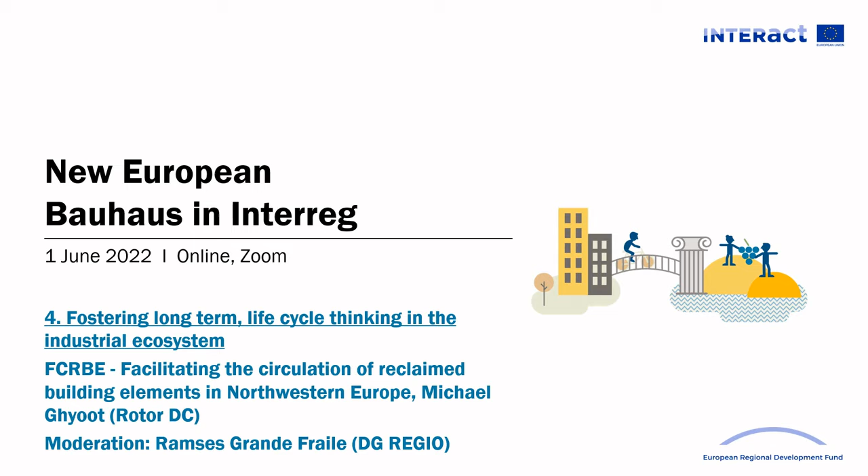Good afternoon, everybody. My name is Ramses from REGIO, and I want to invite you to join me from Interreg Central Europe, now over to Interreg Northwest Europe, where we will hear from our next and last speaker, Ghyoot. And I say last but not least, because Michael, working with Rotor, has been one of the pioneers in Europe

in not only dreaming, but also transforming our construction industry away from a linear industry where buildings are built, used, and discarded as waste, and to transform it into a circular built environment where we can design buildings for disassembly, repurpose buildings during their lifetime, and afterwards deconstruct them and use the building materials to build new buildings. So part of this has been done in context of the Interreg Northwest Europe project.

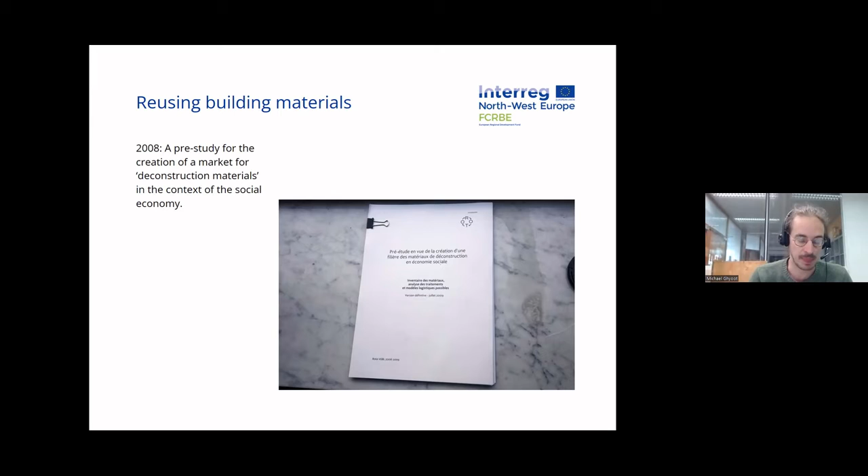Next slide, please. There you see one of the appendices of this pre-study, which was the very first listing of reclamation and salvage dealers around Brussels. And we used this listing for a few years, anytime people contacted us with the purpose of finding materials that could be reused, or finding a way to reuse materials that they had dismantled on their construction sites.

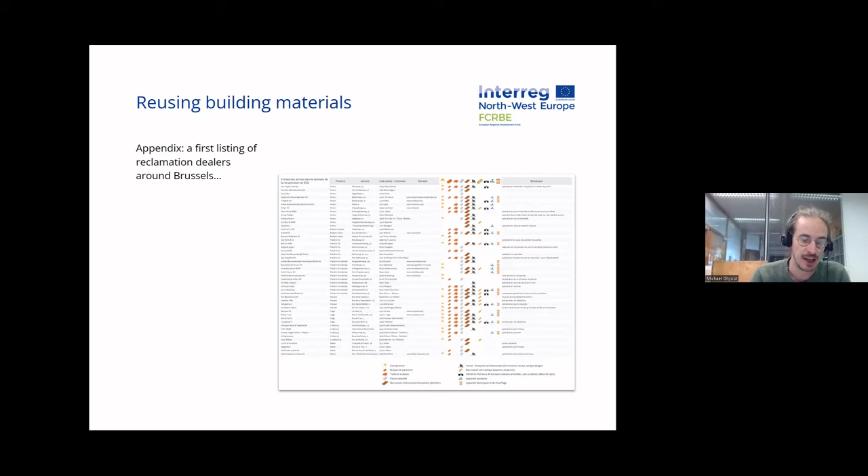And so next slide, we brought this project a bit further in 2011, and it's a project that is still going on. It's called the Opalis project. Basically, it consists of documenting active salvage and reclamation companies. We started around Brussels, and then we enlarged the scope to Belgium and then to Northwest Europe as a whole. That was thanks to the FCRBE project, about which I will speak in a while.

So we see on the next slide that basically Opalis is based on a lot of field work. That's our methodology. We visit most of the companies that we document online. Opalis is a web directory presenting those different dealers and the type of materials that they trade and the type of services they provide. By doing so, we also try to discuss with them the challenges and the barriers that they meet in their practices. And all of that is documented on opalis.eu, which is a freely accessible website. Next slide, please.

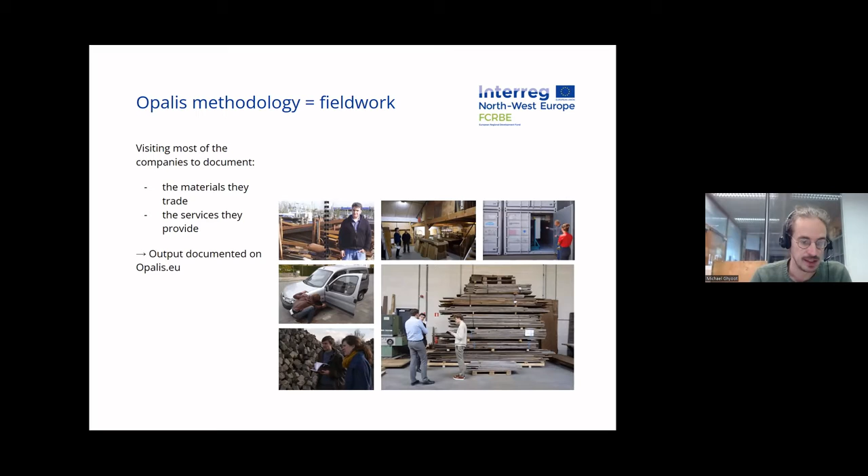And the project Opalis was a very important milestone, I would say, in our development, because it demonstrated to us that although some materials were relatively well taken in charge by existing companies, there were a lot of other materials that were not, that were simply discarded as waste during demolition works. And we saw that mostly in Brussels, which is a city in which we have a lot of office buildings, as you probably know, producing a very specific type of demolition waste, mostly all the interior fittings and interior spaces that are quite regularly renovated.

That's really the key in this business. You need a bit of space because most of the time you will need to store the materials between the moment they are dismantled and the moment they are needed on a new development. Next, please.

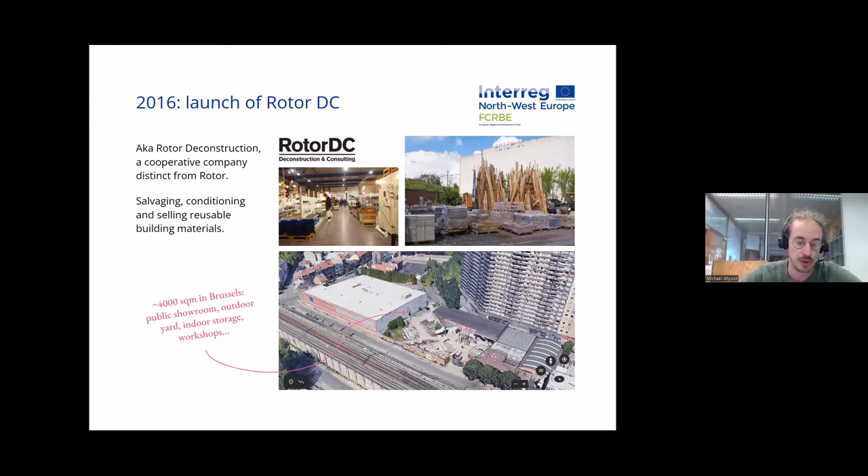So basically for Rotor DC, the source of materials can be very different. Sometimes it's Rotor DC teams that are operating the dismantling of the materials. Sometimes the materials are traded from other contractors or other reclamation dealers. Sometimes it's also private clients or small contractors who bring the materials, the dismantled materials, to our places, and then we take care of the sale, and we split the profit of the sales in this case.

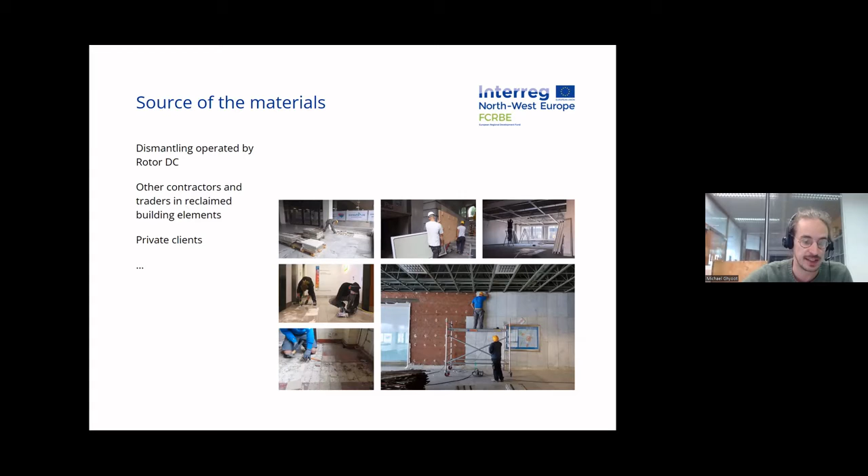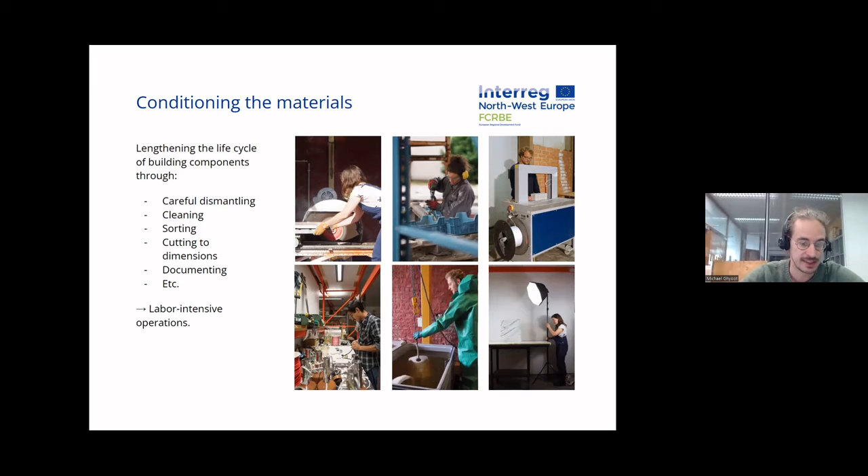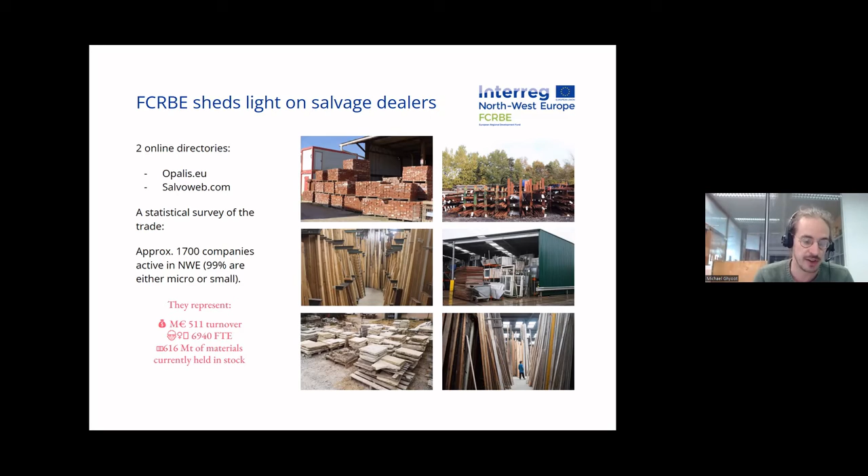Interestingly, the ratio of the amount of full-time equivalents in this sector is quite high compared to the amount of materials. So it tends to show that this type of activity really has a huge potential for job creation while preserving materials and enabling their future reuse. Next slide, please. Yes, this is an illustration of the different sorts of guidelines and handbooks we produced during the first phase of the FCRBE project.

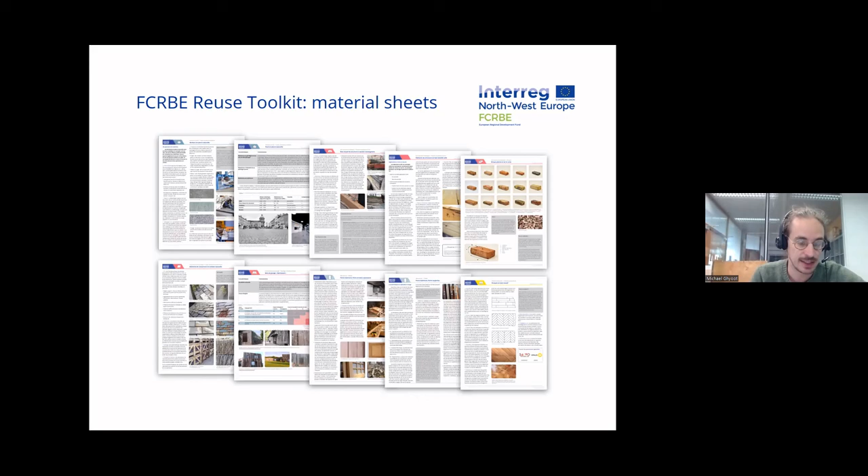Next slide. This is a very popular deliverable of the project. It's a collection of 36 material sheets documenting in great detail all the characteristics of commonly reclaimed and reusable materials, at least the characteristics that are known, but also identifying the characteristics which require further investigation if the materials are to be effectively reused. Next slide. Please, next slide. Yes, these are the pilot operations.

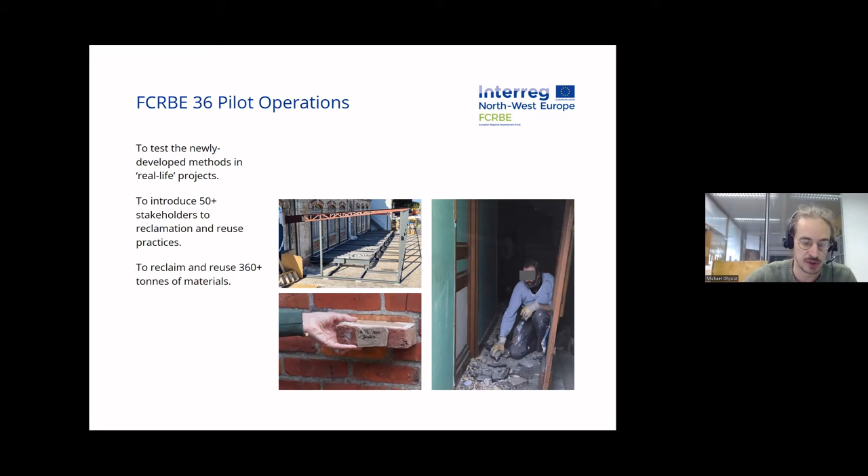As I said, we assisted building owners and design teams in integrating either reclamation or reuse operations as part of ongoing construction projects. And the goal there was mainly to test the newly developed methods in real life conditions, I would say, but also, of course, to introduce a certain amount of stakeholders from the construction industry to adopt reuse practices. And then we also wanted, that was one of the project indicators, reusing or reclaiming 360 tons of materials. And normally we know, thanks to those operations, we probably outreached this goal because some of them were quite ambitious in the end.

There was a lot of documentation being developed to address the most frequently asked questions about reusing building materials. And then, of course, a lot of dissemination events through workshops, seminars, webinars, big presentation days, that sort of format, which really helped to reach a lot of target groups, and that was, of course, an important part of the project. So this, in a nutshell, was the FCRBE project and where it started from. So I hope it contributed to the discussions of today.

Thank you so much, Michael. Indeed, thank you for this fantastic example and for showing us also the cooperation dimension and how it really contributes to create this circular economy, not only in Belgium, but sometimes across borders, across nations in Northwest Europe.